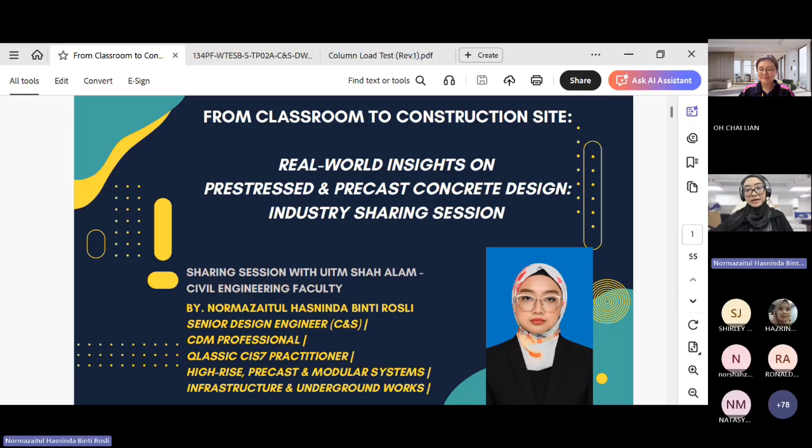During this session, I will engage with all the students by presenting real engineering problems and testing your problem solving skills through discussion and feedback. So we just need student feedback based on the real project insight. We will conclude the session with a Q&A session followed by closing remarks. So everyone okay? Can I get some feedback from the students as well?

I think the students are giving the response by thumbs up. Oh I see. Okay, alright. If anything, let's say the students having any question, you may raise your hand. Okay, alright.

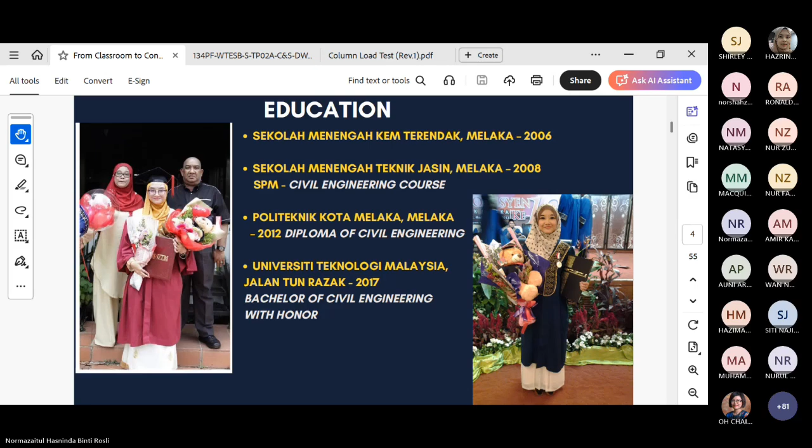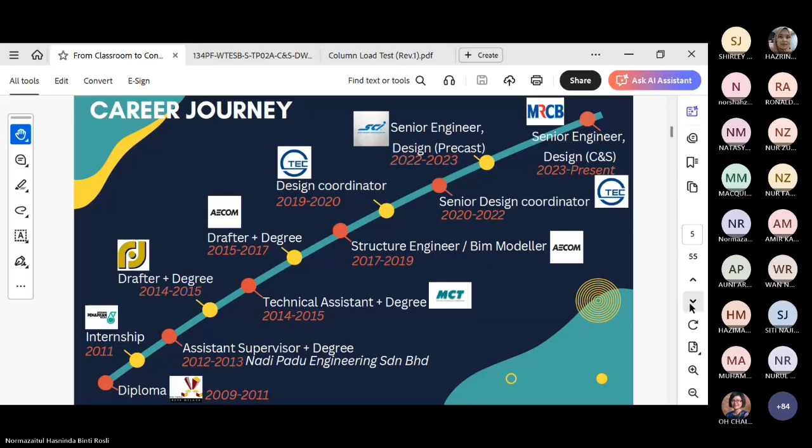So the designer has to ensure we can reduce risks such as instability, crane overloading, and unsafe manual handling.

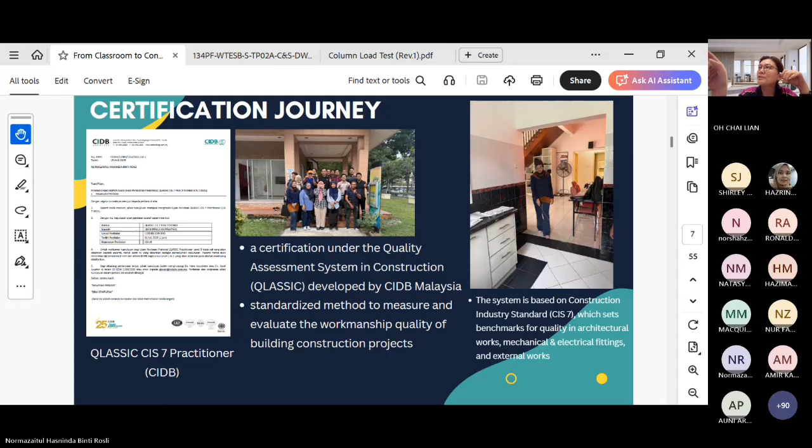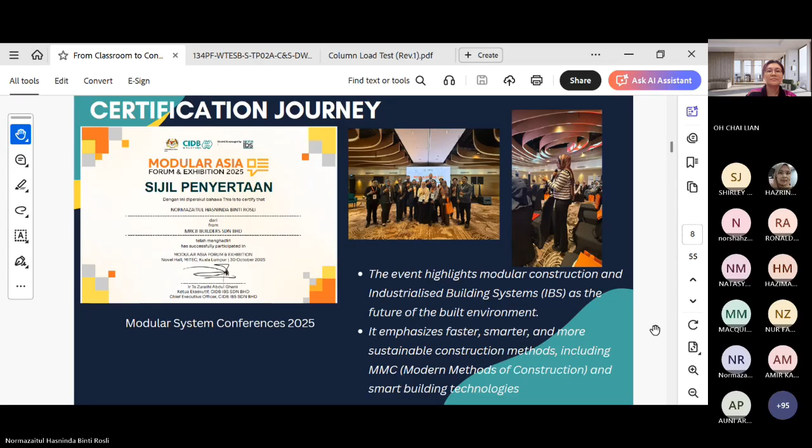I wanted to emphasize to all students, if you get some conferences that you need to attend, it's better to go, because we can get knowledge or brochures, catalogs from there, and then we can keep them for our knowledge.

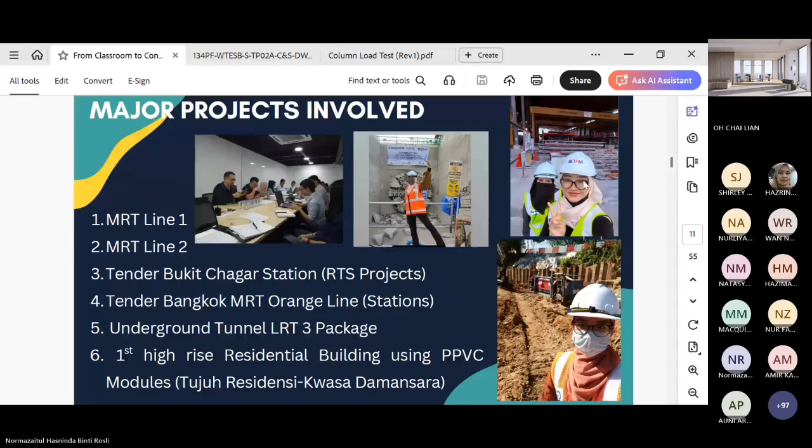So I'll move to the next slide.

I think everyone already knows about pre-stressed concrete basics, so it's just a theory throwback based on your study, but I will present shop drawing samples from my project. Before we proceed, we will understand what pre-stressed concrete is, key concepts of pre-stressed concrete, how it works, and the benefits of pre-stressed concrete.

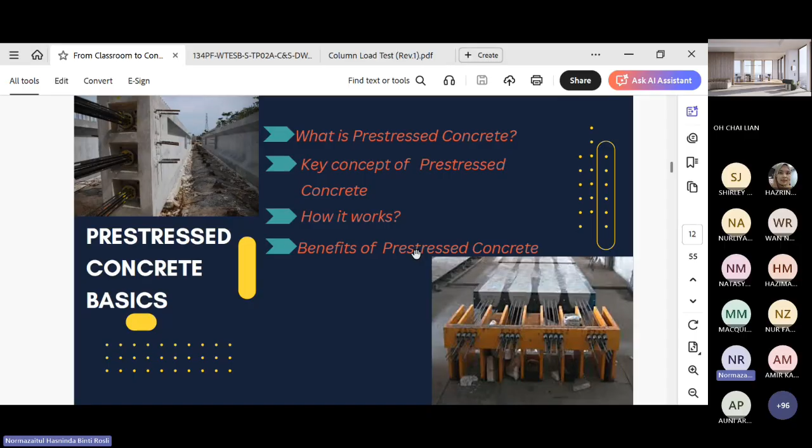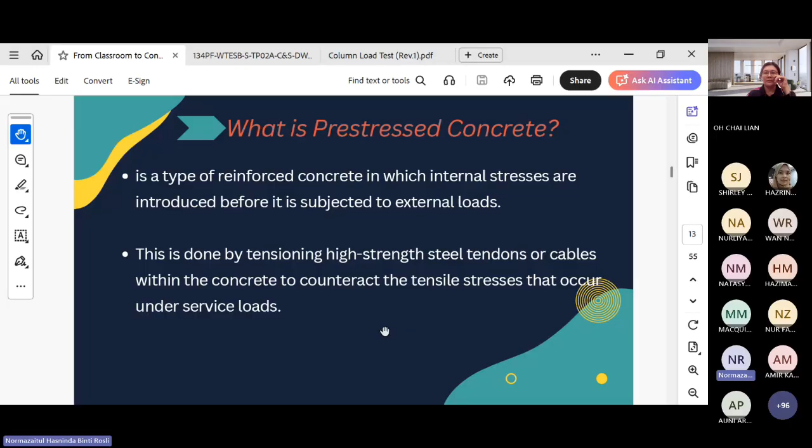So what is pre-stressed concrete? It's a type of reinforced concrete in which internal stresses are introduced before it's subjected to external load. This is done by tensioning high-strength steel tendons or cables within the concrete to counteract the tensile stresses that occur under service load. Moving to the next slide, basically concrete is very strong in compression but weak in tension.

When a beam is bent under load, cracks usually form in the tension zone. Pre-stress is introduced to reduce or eliminate these tensile cracks. So what we do by using pre-stressed concrete is use high-strength tendons, apply them, and apply force to the concrete.

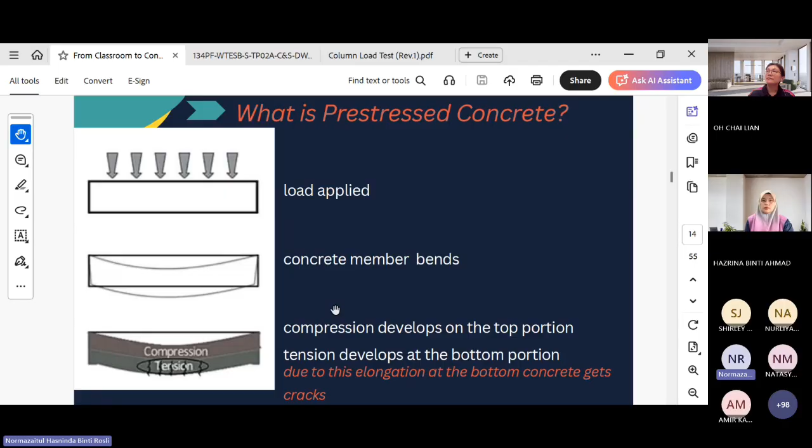Tendons can be high-strength steel wires or strands. Tendon can be much stronger than normal reinforcement steel, so that when tendons are released, compression is generated at the bottom, which tries to counterbalance the tension due to loading at the top part of the beam. So it relates back to what happened here when we applied the load. Tendon is much stronger than the normal reinforcement steel.

Key concept of pre-stressed concrete, as I mentioned, is that it's strong in compression but weak in tension. When we apply a compressive force to the concrete, as external loads are applied, the concrete remains mostly in compression, so when we apply the tendon as shown, we can reduce cracking and improve durability.

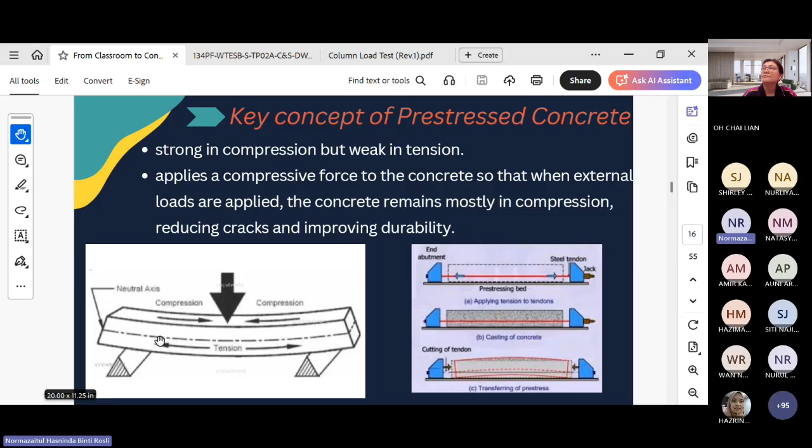So this is pre-tensioning, and we also have post-tensioning. What makes it different is that pre-tension is normally done with the tendon tensioned before concrete is cast. See, we have this tendon, and then we cast the concrete.

But when we come to post-tension, the tendon is tensioned after the concrete has hardened. For example, we mostly use post-tension on site for things like PT slab or transfer beam. However, pre-tension normally happens at a precast factory, where we use it for precast beams or precast slabs.

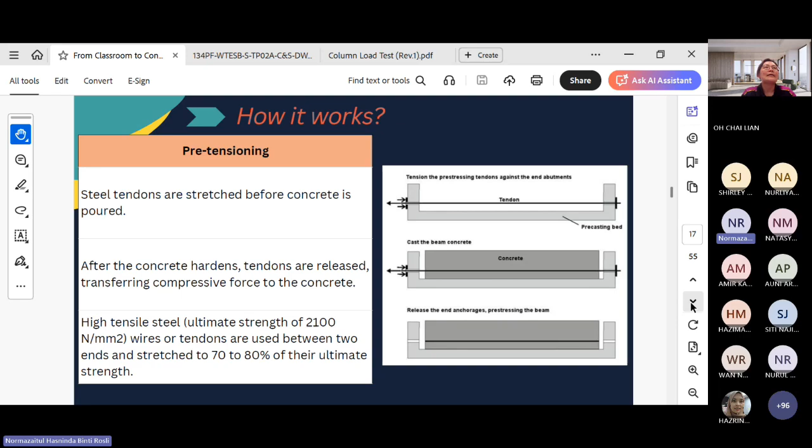So the benefit of pre-stressed concrete is normally that we can use a longer span. We can get a thinner slab or beam because we use high strength tendons. We can reduce cracking, get better durability, and also cost efficiency for larger spans.

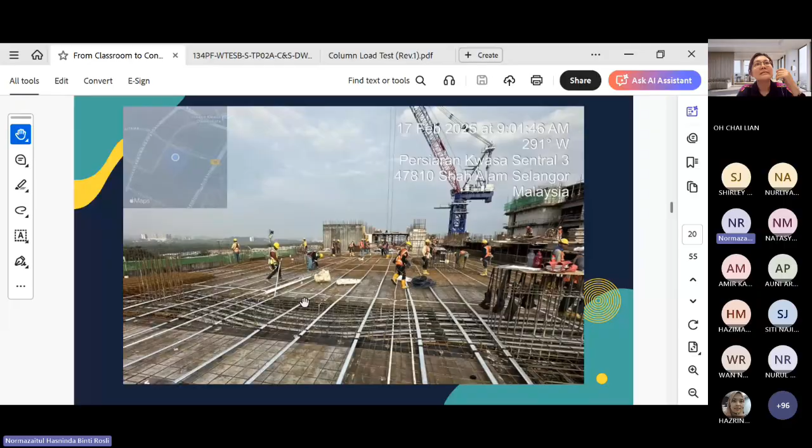My current project uses the parking area as a post-tension slab. This is my current project for the parking slab. So this is the duct, and they use the tendon inside the duct. They install the tendon inside the duct, and after that they will cast the concrete.

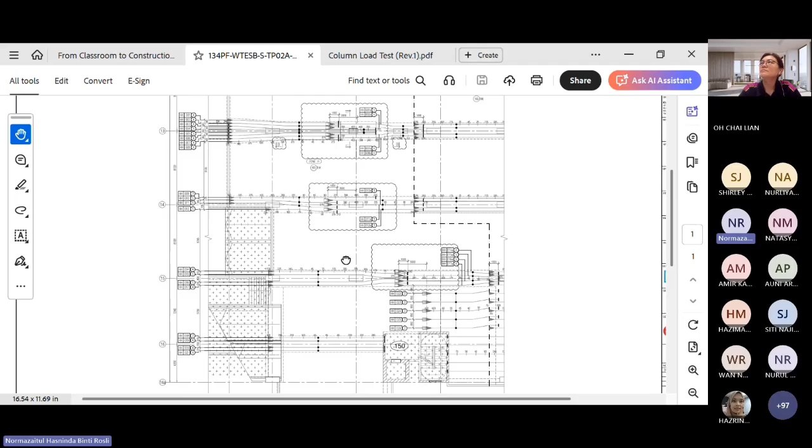This is a sample of the shop drawing for my current project. Normally the shop drawing is done by a professional engineer, and then they submit the drawings to the main consultant to review their proposal for the post-tension slab. So on the section, this is the slab, this is the beam.

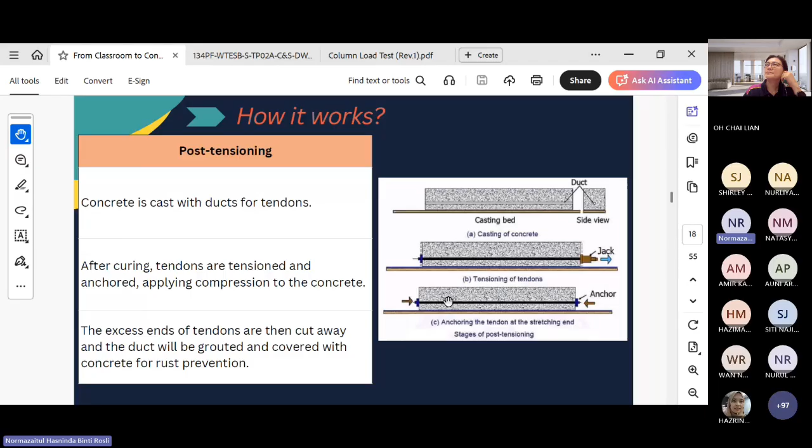So the tendon will be like this. There is a profile up to the end, which you can see in this slide. They use jacking, and then they will inject grouting inside the duct to ensure there is no concrete rust or corrosion happening inside the reinforcement.

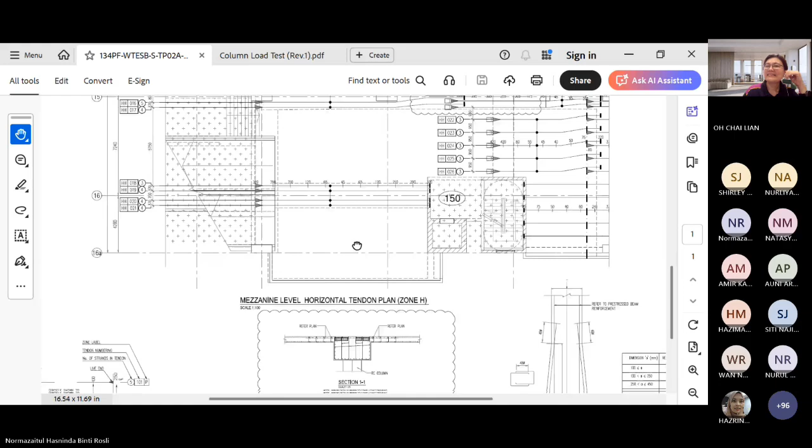Miss Mai, may I know whether you have muted? Sorry, I just started now. Okay, just now okay, boleh, boleh, I teruskan. Because when you start to look into the drawing, kita boleh nampak, tapi after a few drawings, when you say about profile, pun dah tak dengar dah. Maybe you can repeat a bit. Oh sorry, okay, from here, just now before this slide, can you hear? I mean, we can see the drawing, the first drawing that you said there is a profile kan, yang lebih besar daripada this page, but after that, dah lost. Oh, after this one you can hear? Boleh dengar lah tadi, ya boleh, oh boleh, only at the drawings lah. Okay, okay, only at the drawings. Okay, I repeat back on the drawings, sorry.

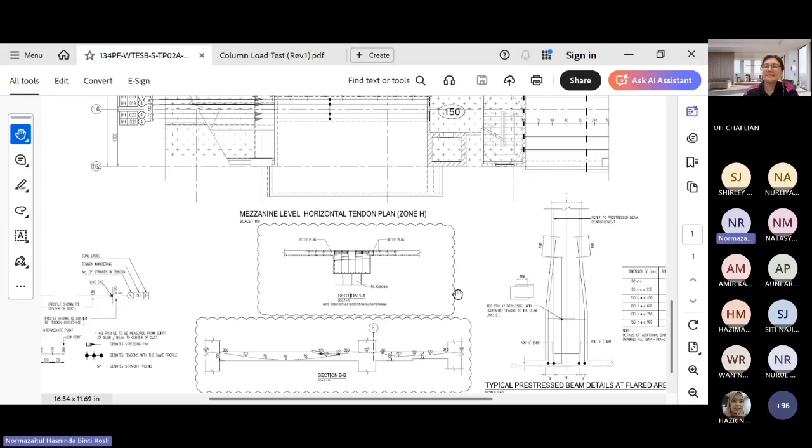So basically this is my current project, for my car park from level 1 up to level 9. So level 1 to level 9 we use the post-tension slab. Normally this drawing is submitted to the main consultant. This drawing is done by the subcontractor, but they will hire a professional engineer to produce this drawing and then submit it to the main consultant, meaning the main contractor's consultant.

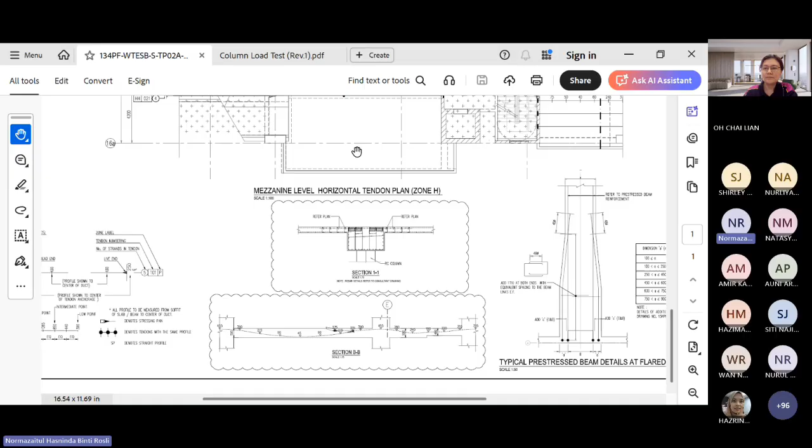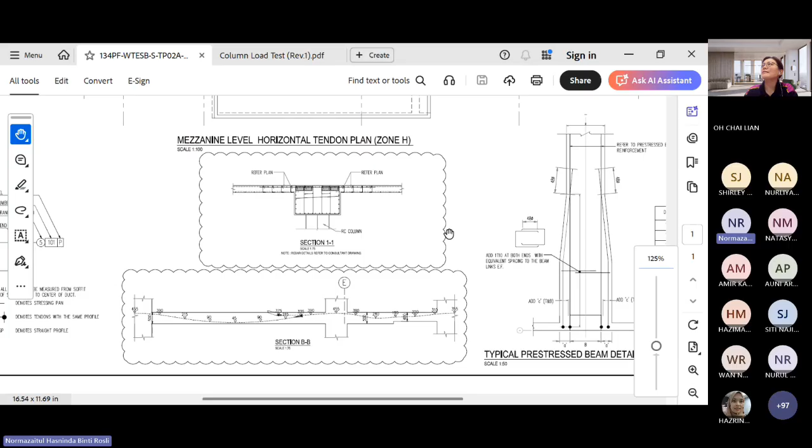So this is the plan view. In the plan view we can see the dead end and live end, and then the profile of the tendon. So in the section you can see the profile of the tendon duct. This is the one that normally a consultant will review and give approval before they can start work, as per the drawings, as per the specs, as per the picture here - this is the one that they did.

So before I move to precast concrete basics, that was about pre-stressed concrete. Is there any question from students?

No, madam, no. Okay, thank you.

Okay, precast concrete. We will learn more about what is precast concrete, why precast concrete, types of precast elements, precast concrete versus conventional system, the application, and also the challenges.

So I think everyone knows about precast concrete, where we cast and cure it off-site. This means that normally suppliers will have their own factory. When they have their own factory, they do the element at the factory and then transfer it to the site. It normally consists of a batching plant, which they run themselves so they can control the cement, water, fine aggregate, and admixture as per the specified design.

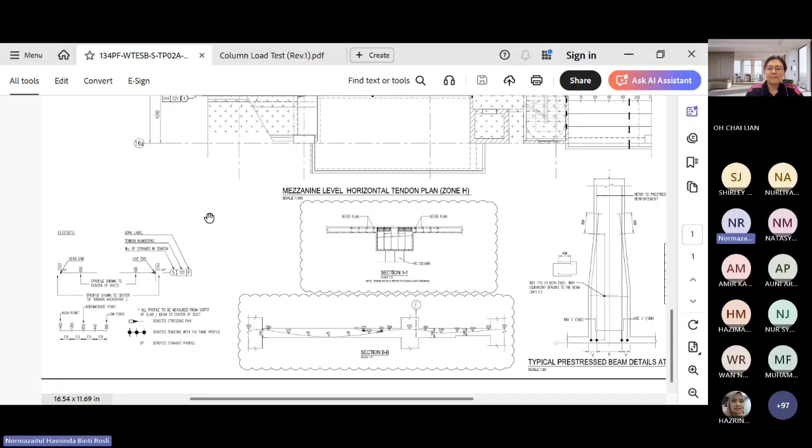Korang tak nampak the slide? Tak nampak slide. Stop sharing, I share again.

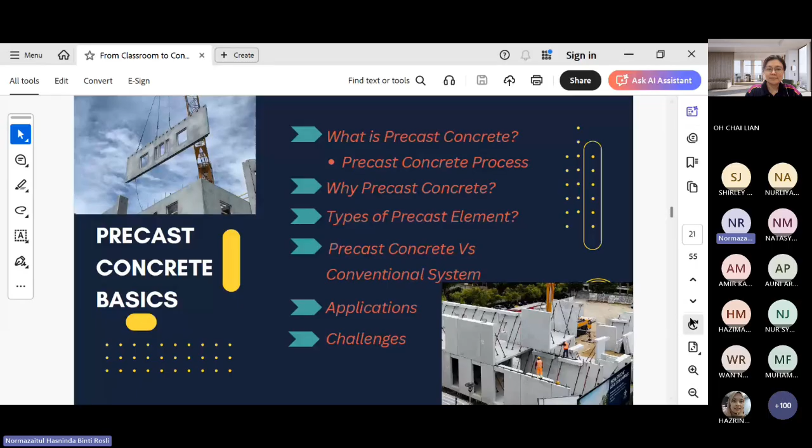So this one I already mentioned just now. So what is precast concrete is more on to the cast off-site. Off-site meaning we make it at the factory, not at the site. So normally the people who make precast, we call them supplier.

Supplier, for example like API, GCAS, Speed Concrete. So this is the main competitor in Malaysia. Normally they will have their own batching plant at their own factory, so they can control their own cement, their own water, because water also has quality requirements. They don't use just any water, like from rainwater, that's not allowed. So they will use quality water, and they test the water before they can use it.

And then there's the size of coarse and fine aggregates and admixture. They mix according to their specified design. This specified design, normally the supplier will check with their client, because every project has a different specification of the design and project. So like my project now, since it's PPVC, the size, coarse and fine aggregate is different because of our design.

Mostly we use Singapore's standard, because PPVC has a high standard, so it's a bit different. So every supplier needs to check with the project itself, how they should use the cement, water, coarse and fine aggregate - I mean the spec, the cement ratio, water ratio, like that.

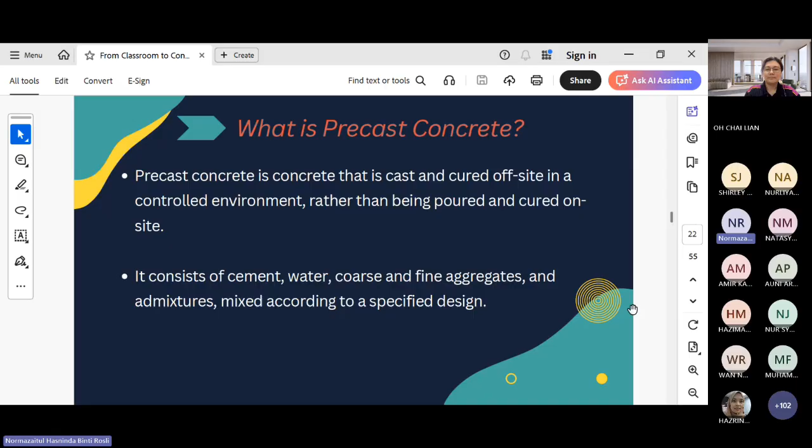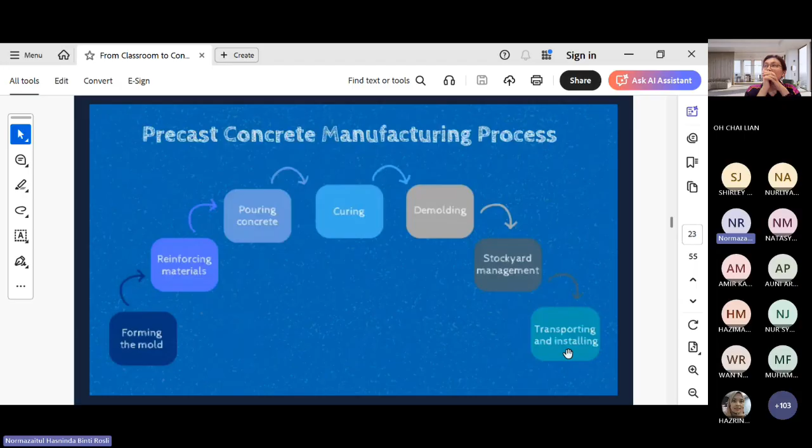And then this is the process: forming the mold, reinforcing the material, pouring the concrete, curing, demolding, and then they do stockyard management, and then transport to the site. So this is the clearer picture of what the supplier usually does at their factory.

So first is forming the mold. Normally the supplier will form every element's formwork. But their formwork, normally they use steel mold. Steel mold because it's easy to clean, easy to maintain, and it's more durable. And then second, reinforcing material.

After we achieve the strength, we do the demolding, and then stockyard management. Stockyard management - normally the factory needs to be big, because they will produce the precast element every day. So when they produce precast every day, they need a very large area to place every precast item that's already completed. So that is called stockyard management.

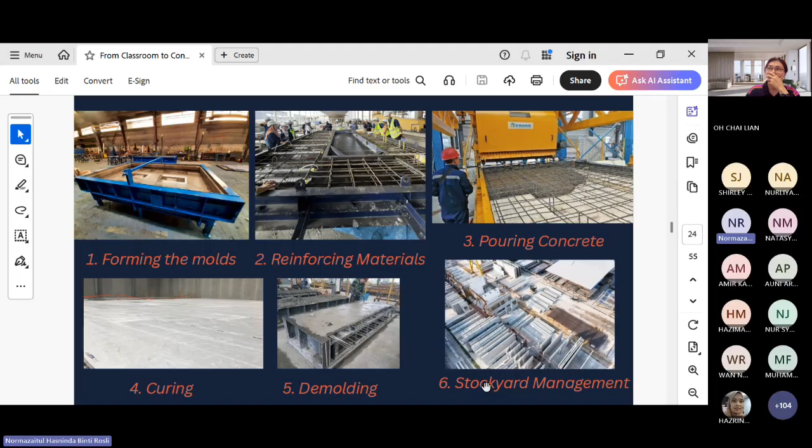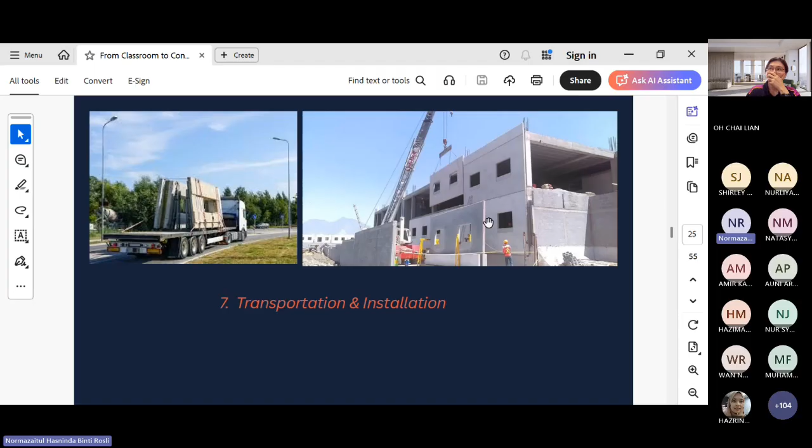So why precast concrete? As I mentioned, number 1 is quality control - better strength, durability and finish because everyone can control the quality inside the factory. Second, speed of construction, because we can control - we're not affected by the weather. At the site we're exposed to weather, but off-site we can work anytime, so every day we'll be having a casting of the precast element every day.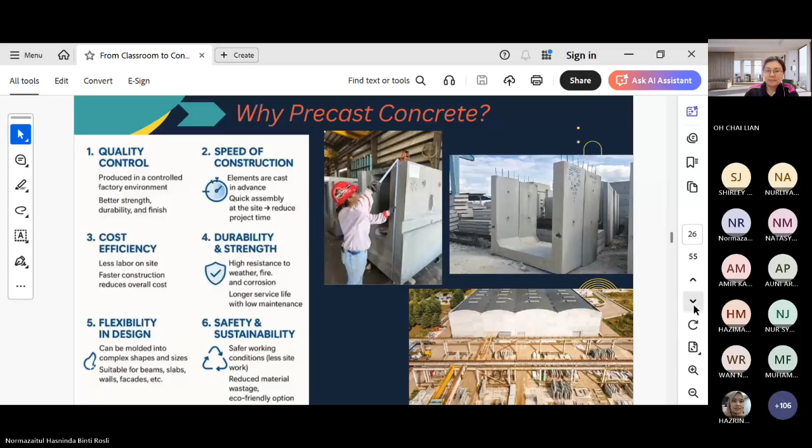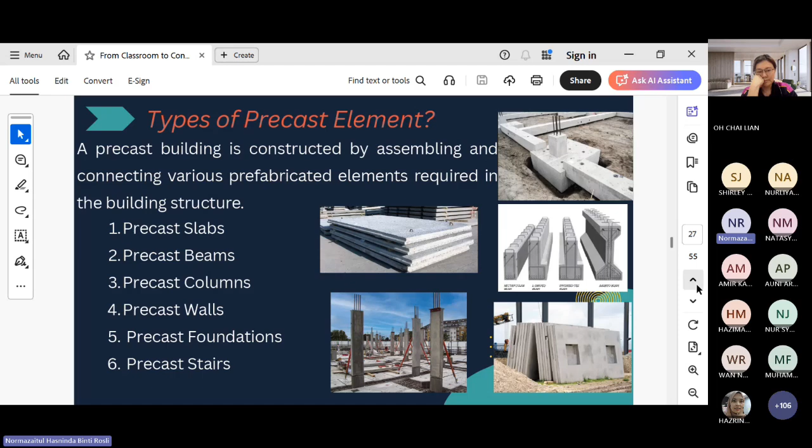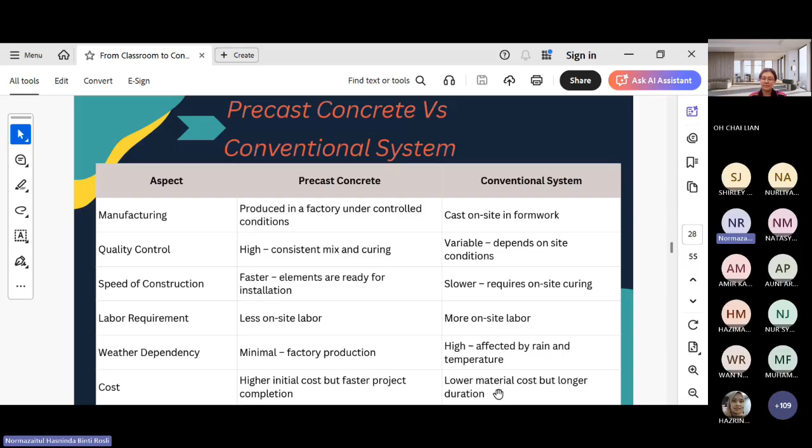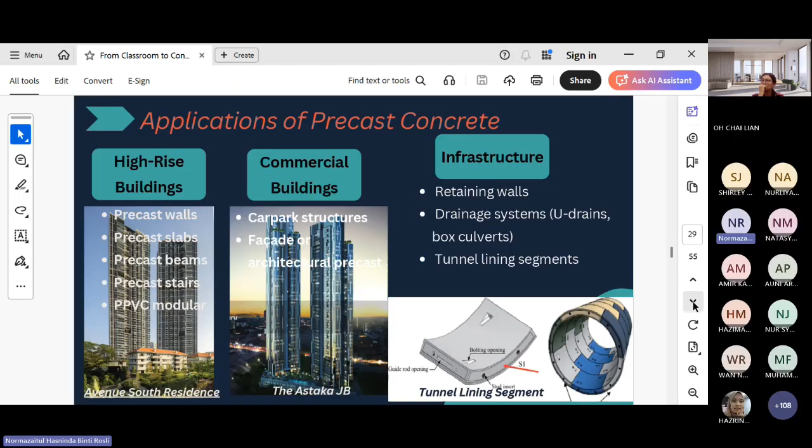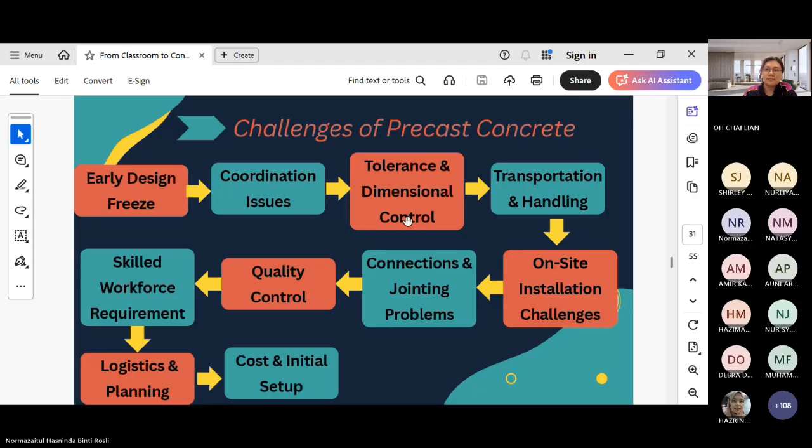Before I end this precast concrete slide and move to PPVC, does any student have any question? No. Okay, thank you.

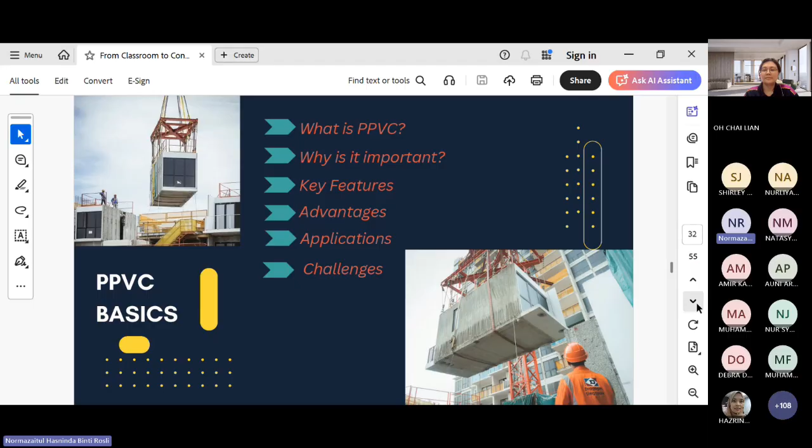So we move to PPVC basics. What we will study: what is PPVC, why is it important, key features, advantages, applications, and also challenges. Have any students heard of PPVC before? No. Okay, so basically PPVC stands for prefabricated pre-finished volumetric construction.

So why we call it prefabricated is because we fabricate it at the factory. Pre-finished means we finish the product that we casted - the PPVC includes M&E items and also architectural finishing. Volumetric means it's more about the four walls and slab, floor slab and also ceiling slab. That's why it's called prefabricated pre-finished volumetric construction.

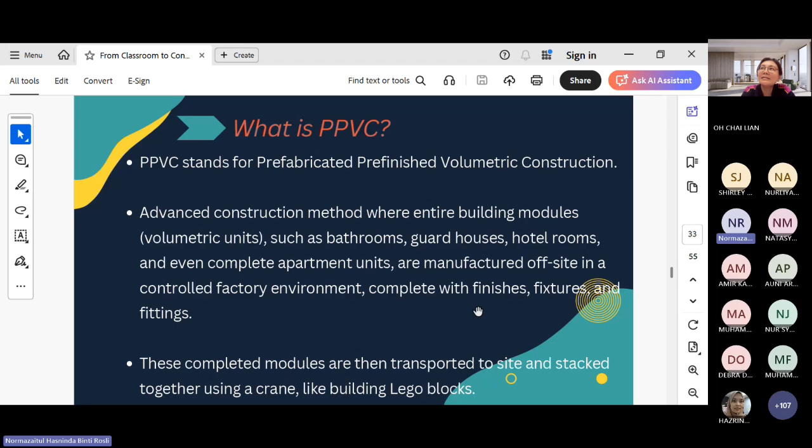It's an advanced construction method where entire building modules, like a complete apartment unit, are manufactured off-site, same as precast, manufactured off-site in a controlled factory environment, complete with finishes, fixtures and fittings. These complete modules are then transported to site and stacked together using a crane, like building Lego blocks. This is what we call volumetric - this one is concrete itself, and then we lift it and put it on top of the lorry before we can lift it at site.

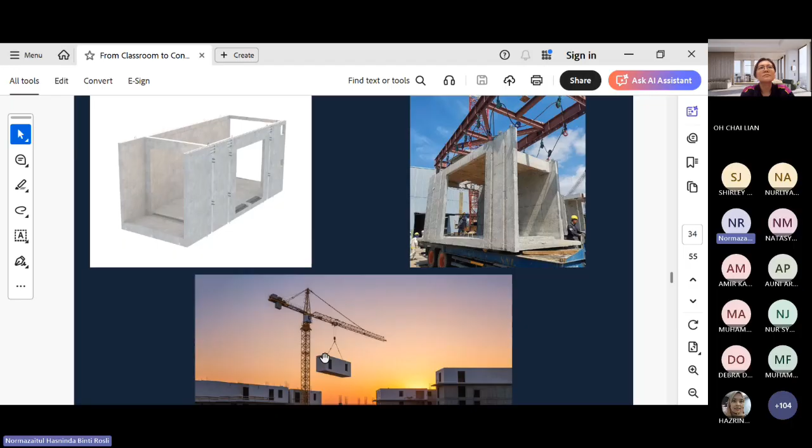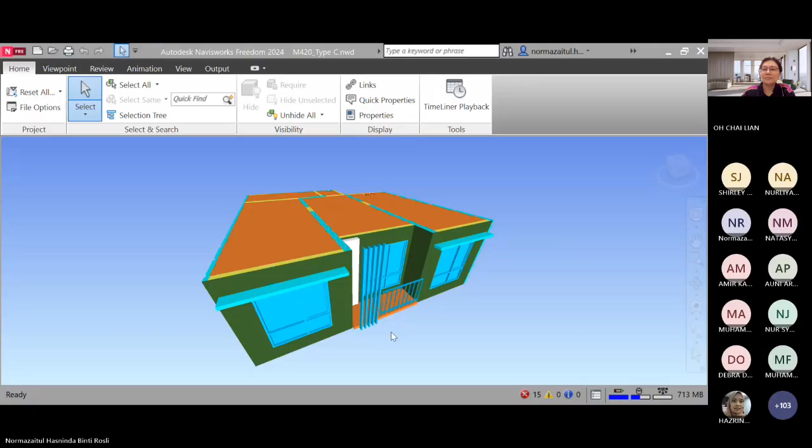So before I move further, I would like to share the Navisworks. Okay, everyone can see this? Yes, 3D. Okay, so this is an example of my current project where from the top we can see module number 1, module number 2, module number 3, module number 4.

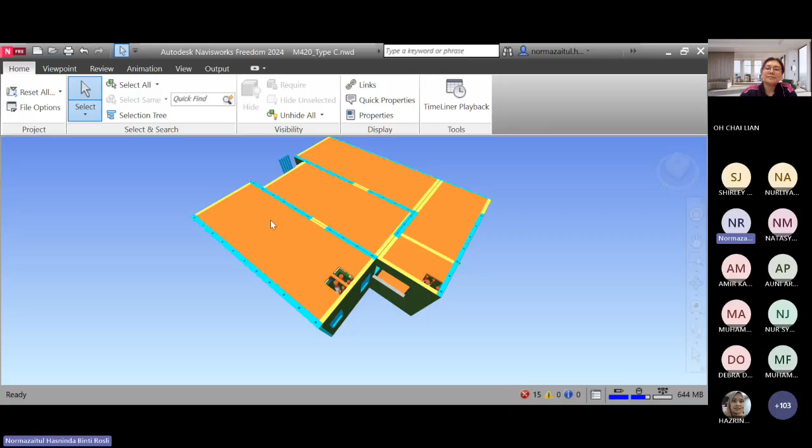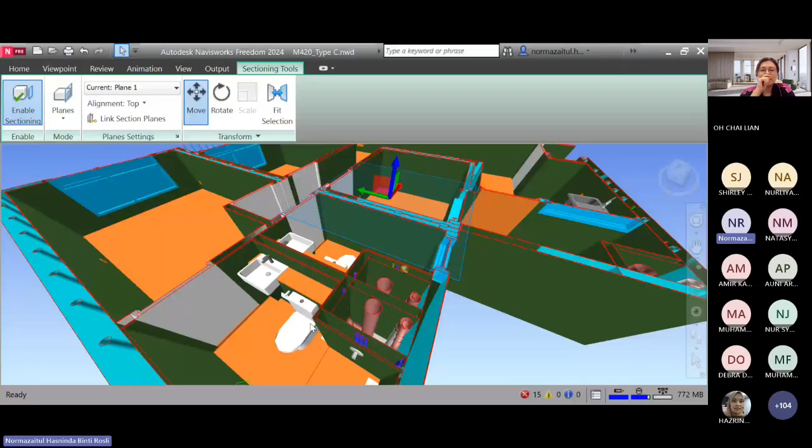So based on the slide I showed earlier, this is one module. And then if I cut the section, we can go inside. So the architectural fittings and M&E fittings are already inside the module. And then we lift the module to the site and install on site, like this one apartment unit.

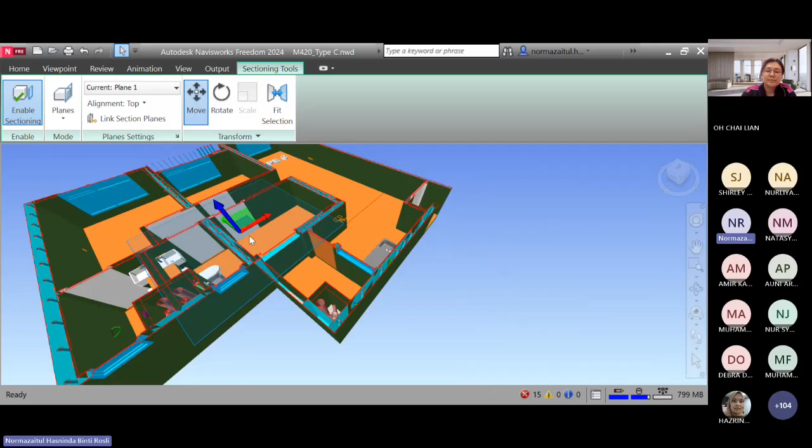This is the most important thing the engineer needs to do, because coordination is very crucial. For C&S engineers, normally on the floor slab, floor beam, thickness of the wall, thickness of the ceiling, and the jointing to other modules. So this is the Navisworks 3D view that we use for this project for coordination design between consultants, M&E, architect, and also C&S.

So why is it important? Because of course PPVC - now mostly in Singapore they already use PPVC for apartment buildings, high-rise residential buildings, for over 10 years already, and in Malaysia we just started PPVC works.

Because it's faster construction, it can speed up construction by about 40 to 50%. Higher quality, safer construction - safer construction meaning when we use fewer workers, there will be fewer accidents. So sometimes there is an issue on site, like at high-rise works, which can affect incidents. So it's more about safer construction, and then better coordination for BIM plus PPVC.

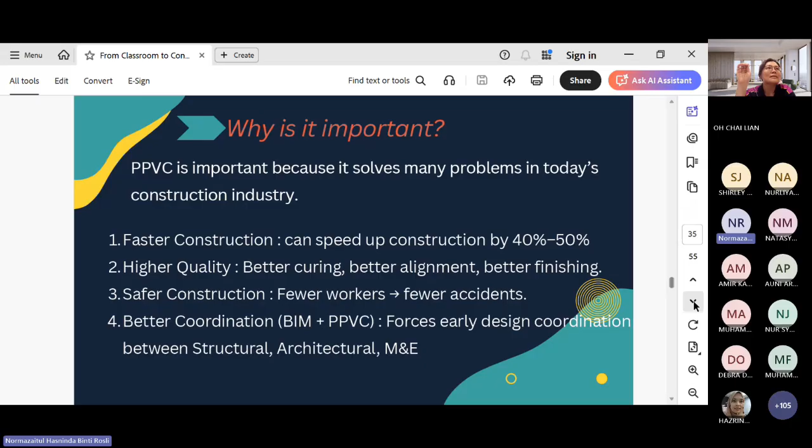So it forces early design coordination between structural, architectural, and M&E. So key features of PPVC - we have 8, but I will share 5 points, which are 3D volumetric modules, factory-finished construction, faster on-site assembly, integrated M&E coordination, and improved sustainability. So these are the 5 key points for PPVC.

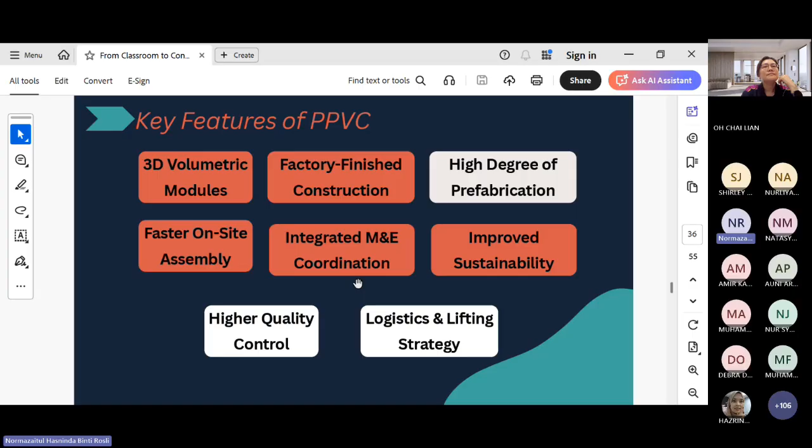So the first key feature of PPVC is 3D volumetric modules. Each module includes wall, floor, ceiling as a single rigid unit. So as a designer, you have to ensure you have all these elements and design accordingly based on how many levels you design. So that's the key feature of PPVC - 3D volumetric modules.

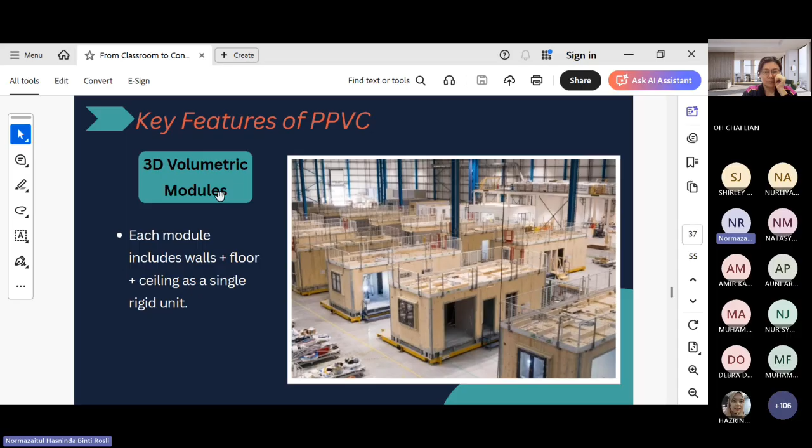And then factory finish construction. So it will include structural components, architectural like tiles, paints, door, and then M&E works - whatever needs to be concealed inside the ceiling or inside the wall, like pipes, conduits, and fittings. So basically PPVC will install everything in one, and then we transfer to site to install.

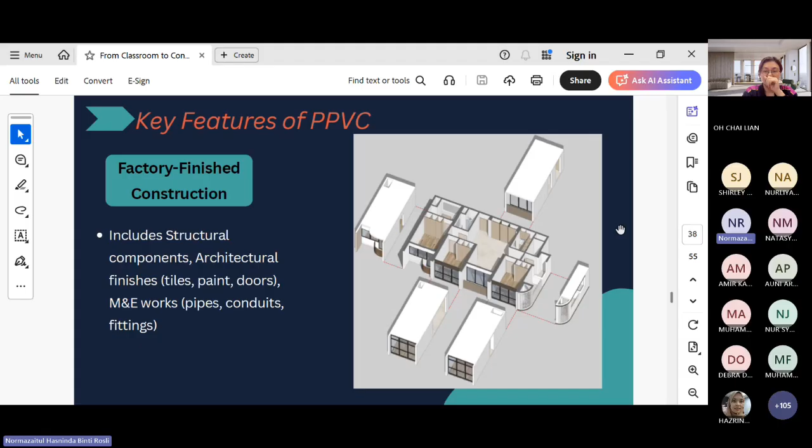And then we have faster on-site assembly. Modules are transported and installed using crane. So the crane is the temporary works which the engineer also has to design. This is important - you have to know the weight of the module you need to lift, the design of the lifting frame, and the lifting point as well. So you need to know everything so you can check the temporary works of the crane.

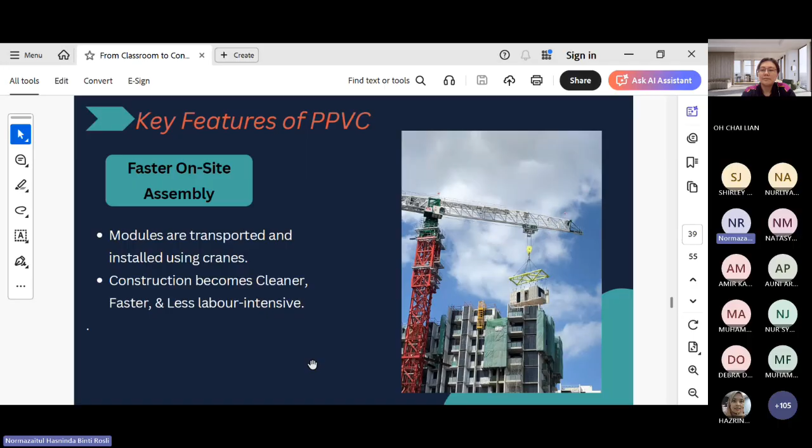Okay, so construction becomes cleaner, faster, and less labor intensive when you have checked everything in one. So next is integrated M&E coordination - these are the M&E items inside the PPVC. Electrical, plumbing, and mechanical services are built inside the module, where we require early coordination between all disciplines, like I mentioned earlier.

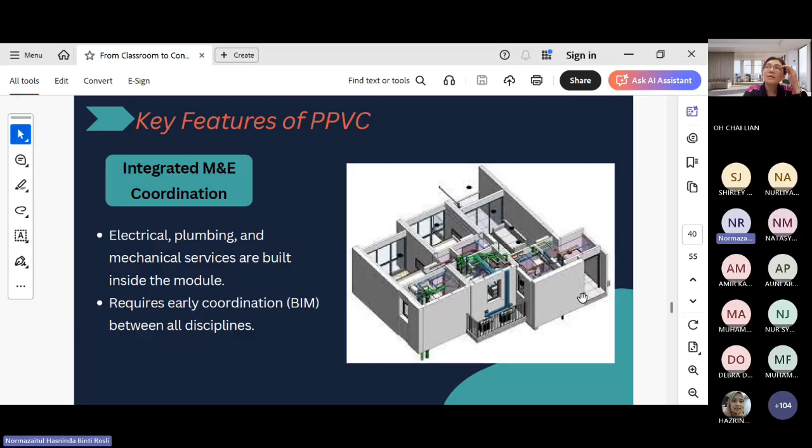So improve sustainability, meaning that we significantly reduce construction waste, and we can get energy efficiency, lower carbon emission, and less site disturbance like noise and dust pollution, traffic congestion, because we don't have to transport so many items at once on site, and fewer workers on site. So we can predict the schedule, like what time you want to send this module.

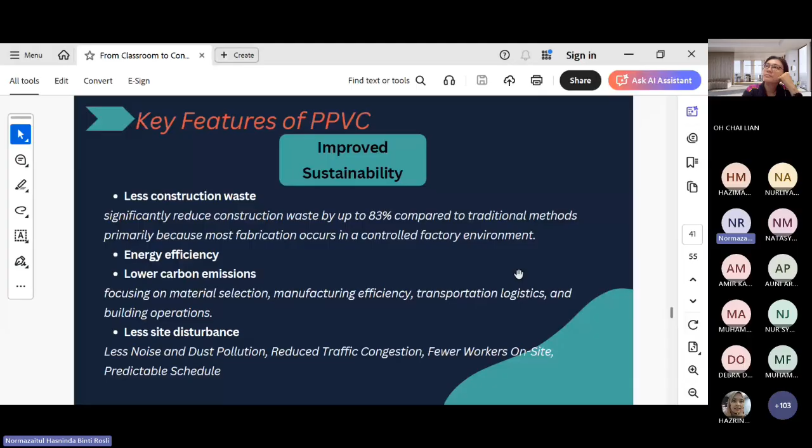So advantages of PPVC - it's similar to precast concrete. It's speed of construction, with quality control, safety, environmental impact, labor efficiency, cost predictability, and sustainability. So normally safety is the most important thing when we do construction, because we can reduce on-site hazards when we do most of the work at the factory.

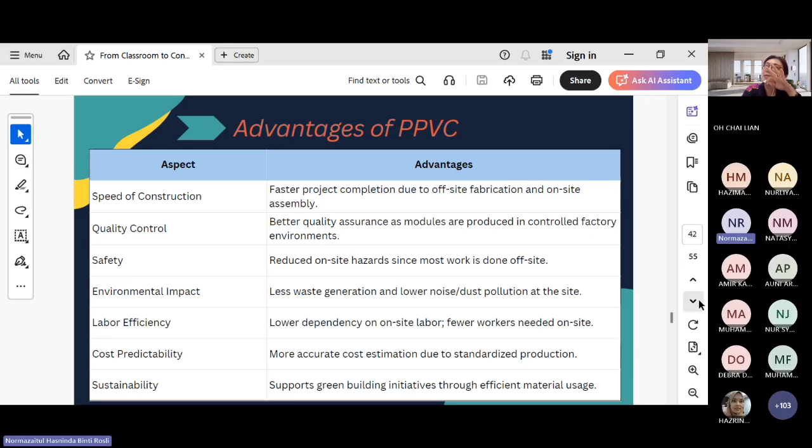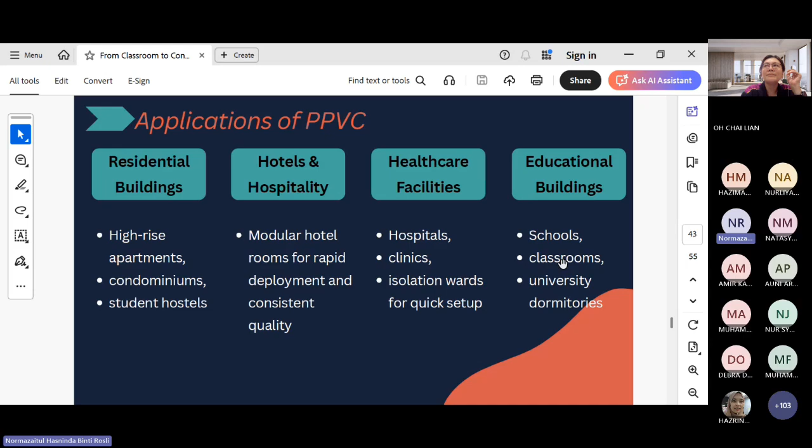So application of PPVC normally will mostly be for residential buildings. Hotels and hospitality is one of it, but it's quite difficult as well, because hospitals might be different. Healthcare facilities, educational buildings like schools - like my current tender project, we will do a school project, classroom at Johor Bahru, and also one at UPM as a hostel. So currently I'm doing the tendering for JKR project, school and university dormitories, and then commercial buildings, and also temporary structures like worker accommodation, simple buildings.

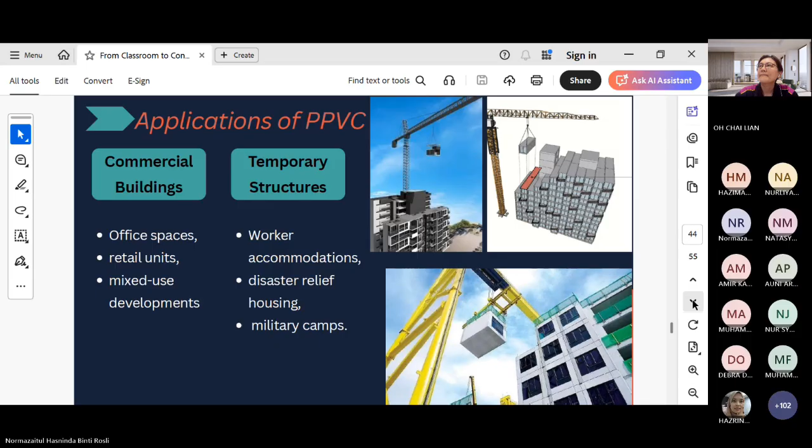Challenges of PPVC are also similar to precast, where we require high initial cost. We need to have an investment for factory setup and specialized equipment, meaning we need a crane, and also a machine, hydraulic jack, to use the steel mold. So this is the high initial cost.

And then there's design limitation. We have to freeze the design at an early stage. We cannot change any design once we have already cast the element.

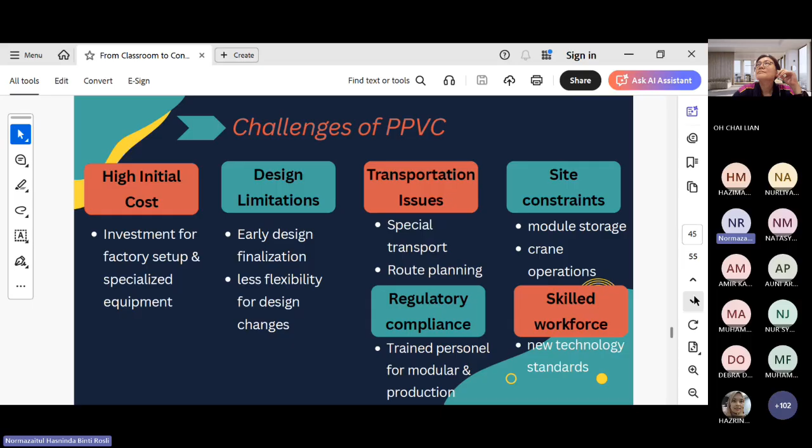And then transportation issues and site constraints. Site constraint is due to how you want to lift the module, because a module is quite big compared to a precast element. Precast element can be done panel by panel, but with a PPVC module we need to tackle it because it's quite big, sometimes 30 to 40 tons for one module. We also have to comply with regulatory requirements and need skilled workers to operate and install the modules and connect module to module.

Before I move to the real project insights, does anyone have any question, or want some rest, since it's already been 1 hour talking here? Is everyone still okay? Yes, yes, yes. Oh okay, great.

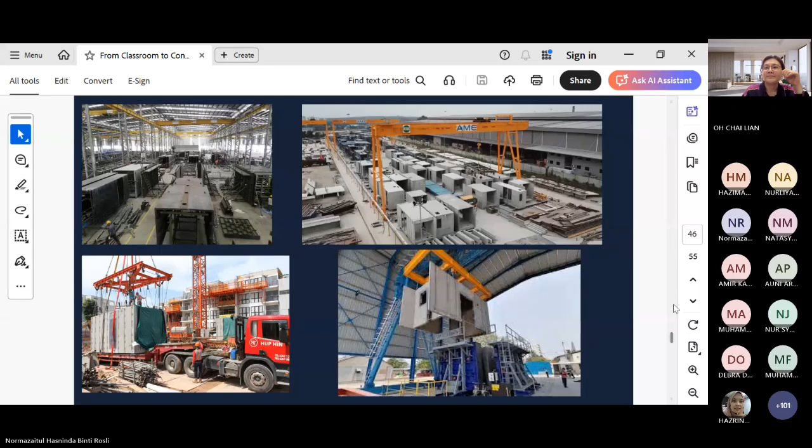So now I'll go to real project insights, where I faced issues during the project. Sometimes when we enter a project, it is not always smooth. Sometimes there are issues during construction or during the design stage, but I just wanted to share this with the students.

This issue usually happens when structural beams are too deep, slab thickness is not coordinated early, or it's wrongly constructed by the contractor. As an engineer, we must detect this early during design or coordination stage, not during construction. This issue was normally because the contractor wrongly cast the levels. The solution may involve optimizing the beam depth, using a flat slab or PT slab, or adjusting the driveway gradient. This teaches us that engineering decisions directly affect the daily user, meaning it's not just about drawings.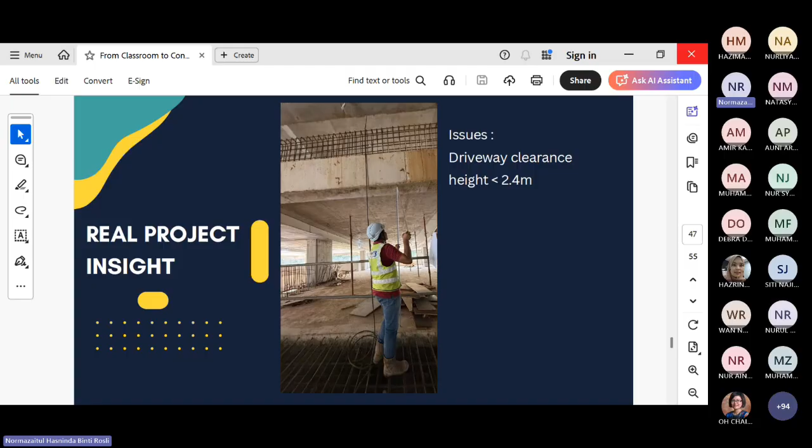The second issue is a missing beam at the podium car park for the corridor connection. This is our apartment unit, this is the parking area. We have to close this area, but in between we will have a corridor. The rebar shown should be the parapet wall, and above the parapet wall should be the beam, but this is the beam that they are missing - I mean, missed by the contractor.

I can say these issues occurred due to site coordination gaps. A corridor connection was introduced at podium level, but the supporting beam was missing at site as there was no RFI - request for information - or coordination done on site. In the drawings, the beam is shown, meaning the design drawings already had it, but when they couldn't see it or misunderstood and misinterpreted the design drawing, this happened because they didn't raise any request for information to the consultant.

So what happens if we miss this beam? The load path becomes unclear, the slab may be overstressed, and cracking or excessive deflection can occur. This issue has been resolved by post-drilling into the columns on the left and right, doing post-drilling there, then using new starter bars for the beam, and casting it together with the parapet wall. So it's already resolved.

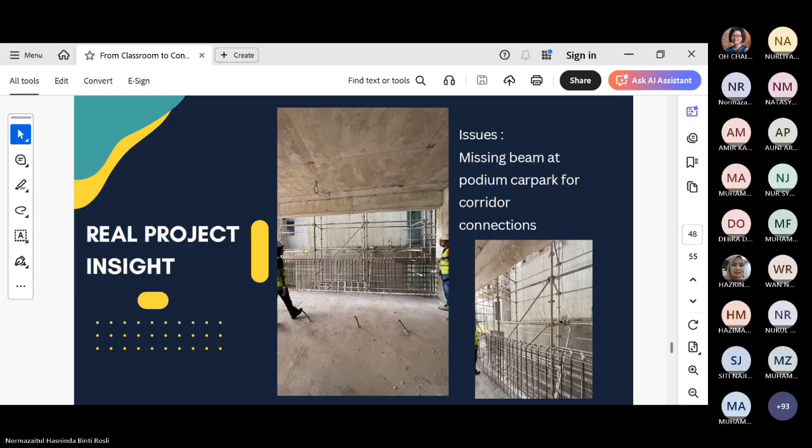And then we go to the third, the next issue: poor concrete compaction, honeycombing or formwork leakage during casting. So we can see the rebar, the big size of rebar, because this is the column. Normally for column we will use like T32, T25, the higher diameter steel rebar.

So concrete strength is not only achieved by mix design but also by good workmanship. Normally on site, we sometimes face honeycombing, poor compaction, leakage from work joint. I think this usually happens due to inadequate vibration, because when you apply the formwork and pour the concrete, you need good vibration so the concrete flows consistently over the area. Maybe also because of congested reinforcement and poor formwork sealing. So as an engineer, we must inspect, document and decide whether repair is acceptable or structural rectification is required.

So this shows the importance of site presence, not only office design. Normally there is a representative for this inspection.

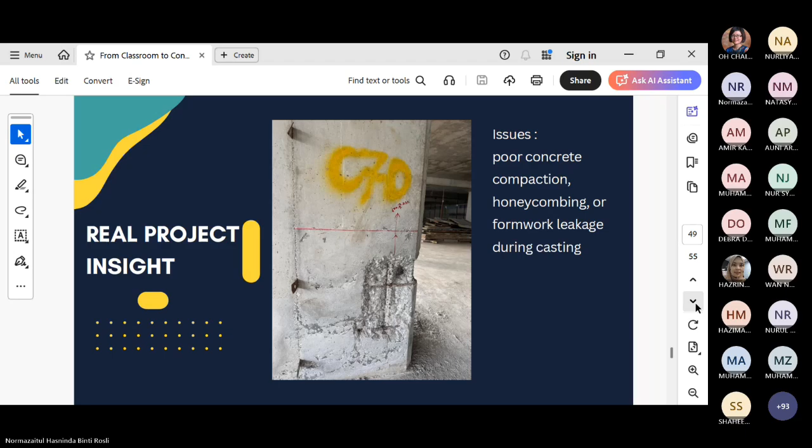So next is wall scanning mock-up for composite wall, PPVC module. Scanning is a non-destructive testing method using advanced scanning equipment, where we can detect whether the wall is fully grouted, any void, gap or honeycombing inside the wall, and the uniformity of the concrete or grout.

So by performing wall scanning, we can ensure the wall meets the design specification, is safe, and will perform as intended over its lifespan. This process also allows us to identify and fix any issue before they become serious problems, saving time and cost in the long run.

So this is the scanning item for our PPVC module jointing.

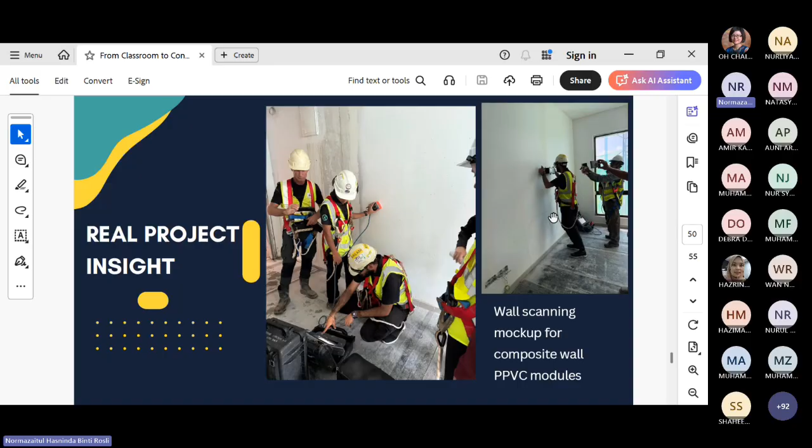Next, mock-up with Hilti coring machine for Doka self-climbing installation. Self-climbing formwork systems like Doka require precise anchor and coring location. So before full installation, we carry out a mock-up using a Hilti coring machine. The objectives were to verify coring accuracy, ensure no reinforcement is cut, and confirm installation sequence. We also wanted this mock-up because we want to prevent structural damage, installation delay, and safety incidents.

This also requires engineers to do the method statement before we can directly do it on site.

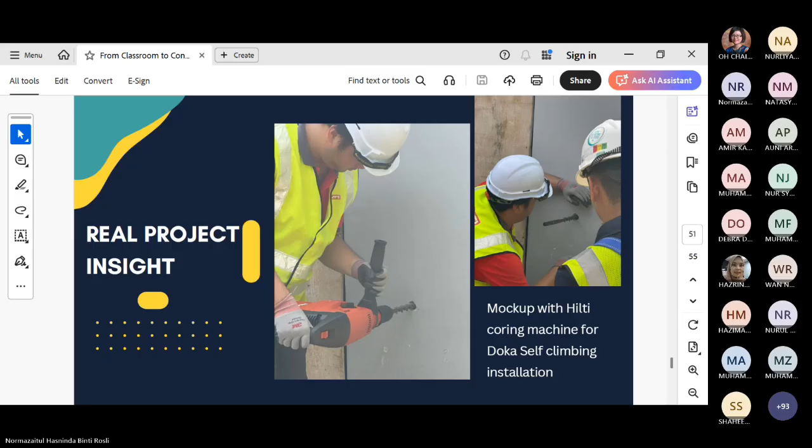So next is PPVC column load test at UiTM laboratory. This is the column load test we did at UiTM Shah Alam lab. The size of the sample is 0.5 meter width by 0.2 meter thickness and 3.5 meter height. The concrete grade is grade 40 and grade 60, because my project is for a high residential building: level 1 to level 10 will use grade 60, and level 11 to 28 will use grade 40. So the lower level will have higher strength concrete and the upper level will have lesser.

So design calculation alone is not always enough. That's why we conducted a column load test at UiTM lab to validate the design assumption, confirm load capacity, and observe real structural behavior. This is where theory meets reality, and what you learn in class, you can apply and verify here.

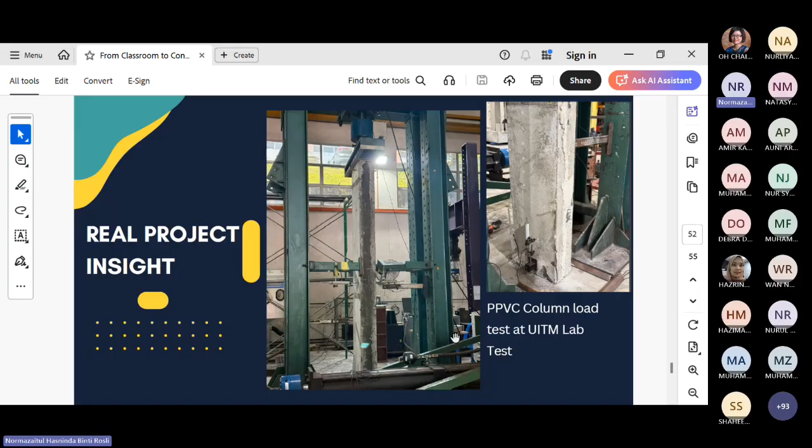Why we need to brief the subcontractor during tender based on our design is because we want them to understand the scope of works, technical requirements, construction constraints, and site conditions, so that when the contractor quotes their pricing for the road and drainage works, they understand the expectation and can give us fair pricing, reducing dispute during construction. Basically, engineers play a key role not only in design, but also in construction, cost, and time.

So basically, these issues show that real engineering is problem solving in real time. What you learn in UiTM is the foundation, but what makes you a good engineer is observation, responsibility, communication, and continuous learning.

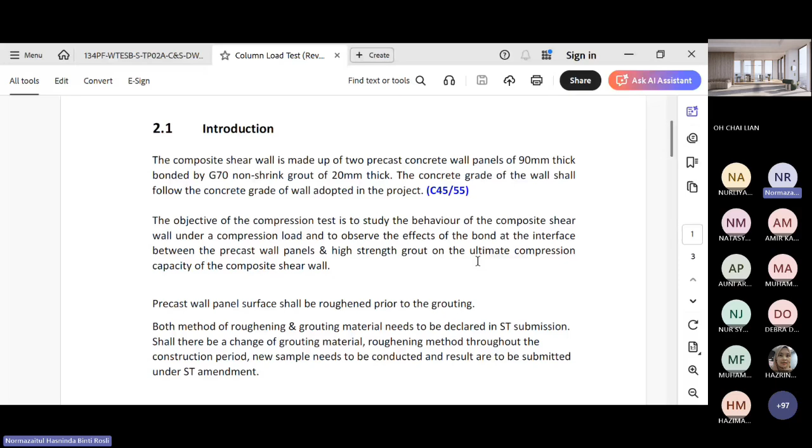Yeah, clear. Okay, I would like to share something based on your question just now. All right, just now you said about the connection, right? So the connection between module to module will be like this.

Imagine this is the wall from module number 1, and this one is module number 2. So the connection will use a high strength wire loop, and then we will install a double bar in between the wire loop, and then grouted with high strength non-shrink grout. Normally we'll use grade 65 or grade 70 for the connections.

Normally what we face is the alignment issue, because at site sometimes we can't get good gapping in between the modules. However, there is a tolerance that the design consultant has already stated in their specs, where we cannot install more than 5mm. So this is the connection, and the problem can be settled because we have a 5mm tolerance.

Is there any authority requirement at this moment about how to state the deviations allowed during manufacturing or construction? For example, is there any requirement from the authority?

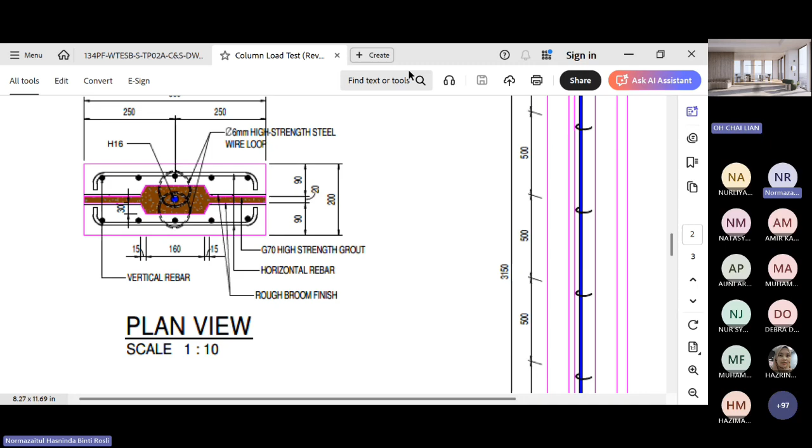Sorry Miss Mai, do you have anything in your chat box? Let me check the QR code... I still checking my chat box, no response. Okay, I think because we already shared the QR with the students, probably if they are now receiving a project from us, they will have some tough time doing the project, so probably they will approach you. Maybe just open the QR and don't close it first, in case the student will ask you some time later.

Is it okay, Miss Mai, that we close the session now? Yeah, can, okay.

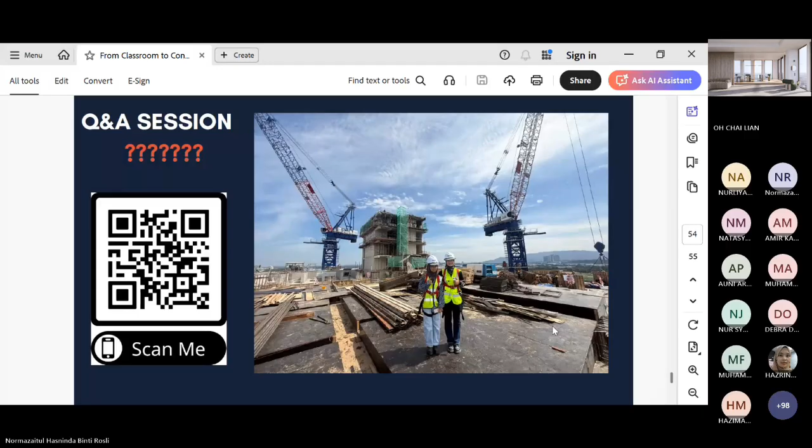Before I end today's session, I want to leave one important message. Engineering is not only about calculation, drawings, or concrete and steel. Engineering is about responsibility - leadership and shaping the future of society. When you design a building, every system you improve will one day be used by real people, for example your family, your communities, your neighbors, and future generations. So don't be afraid to start small. Don't be afraid to ask questions. And most importantly, don't stop believing that you belong in this profession. I hope today's sharing gives every student clarity, motivation, and confidence to pursue their path in engineering. Thank you for your time, and I wish all of you success in your studies and future career.